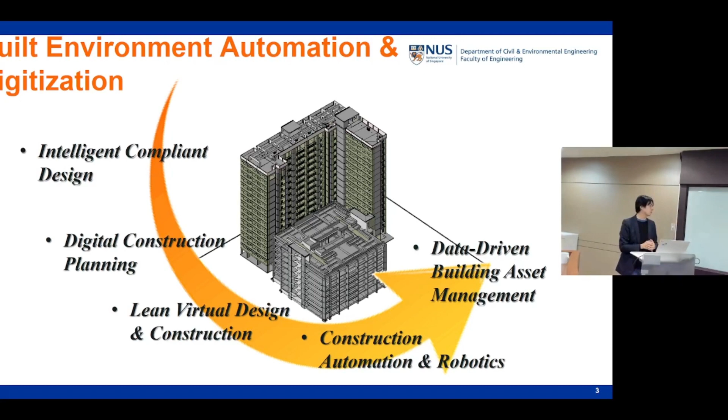So again, like I said, we have been very fortunate. We have had a very good few years getting projects from the industry as well as from the government. So we work very closely with the industry. Quite a number of our projects are sponsored by them. We also have a lot of working relationships with the government agencies.

So I think some of the interesting projects that we have are, the first one, on the drone-based facade inspection system, which I'll talk a little bit more about later. We also have projects related to earthwork volume estimation using point clouds, photogrammetry, and BIM. And one that we are currently working on now is on monitoring of ground settlement using point clouds.

Our recently completed project is on the integrated robotic BIM inspection system, which I will show a little video that we have on. We also have one where we work with one of our industry partners to create an autonomous robotic excavator. And of course, the last one, which I think is very relatable to this group, is on BIM compliance and system structures.

So in terms of our philosophy, as a research group, we have this thing that we call the 3P framework in our research lab. So it encompasses 3 things. One, process, related to information, building information modeling. The other is on product, where we look into automation and robotics as a prime mover, facilitator of the product. And of course, the last one, that I think is the most important, that I'm trying to get my students on board with, is on people. How do we interact with the built environment? So my research group's core themes are focused on these 3 Ps.

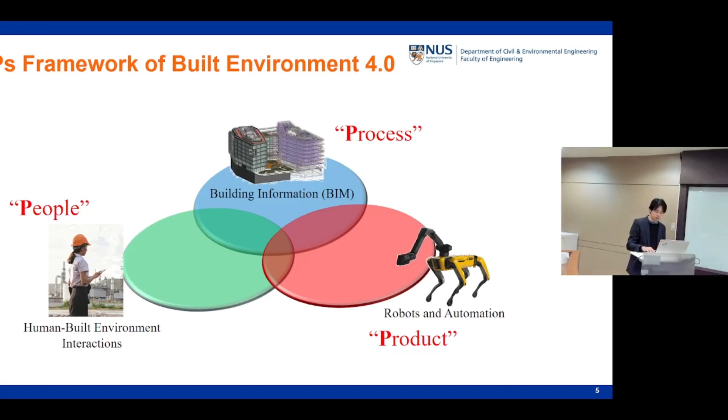So just to show some quick examples of how we have used the 3 Ps. So for the first one, we have developed something we call the crane information models. So the idea is this: if we have building information models of buildings, why don't we have them of major equipment? So one of the things that we have developed is crane information models.

And what's good about these crane information models is that we use them to check on safety compliance: when we are presented with a lifting plan of cranes, whether these cranes fulfill the requirements of the ministry. Not only that, we have actually been able to use this to calculate the reach.

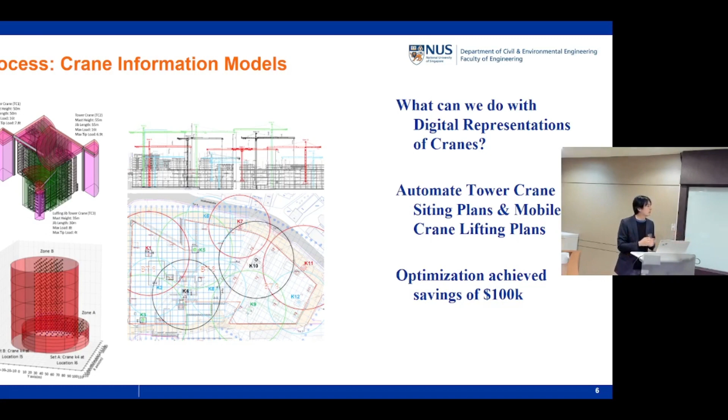And from there we have also been able to use optimization techniques. So harmony search was actually one of the things that we played around with in trying to optimize where we can place the cranes using the crane information models, because that would allow us to see what we can pick up and where we can place the different elements. So that was nice. We worked with a contractor on this, and we showed them that we could potentially save them about 100,000 Singapore dollars, and they were quite happy at the end of the project.

Now, another one on process, again related to BIM. So one of the things which I'm interested in actually is, where BIM is concerned, the major problem with BIM is actually the quality of the information that goes into your models.

As much as in academia and in an ideal situation we tell people that your 2D drawings are actually snapshots of your 3-dimensional BIM, the reality is no. Why? For various reasons, the industry is still developing design documentation in 2D, and then they work the other way around. So from 2D they come up with the 3D in BIM. And when they do that, typically a lot of errors happen.

Human errors will come in and create problems with the model. So we have developed a framework where we use computer vision to compare the 2D design information and the 3D models. From there we try to pick up where the errors are, and identify this to the modelers so they can make that change in their modeling system.

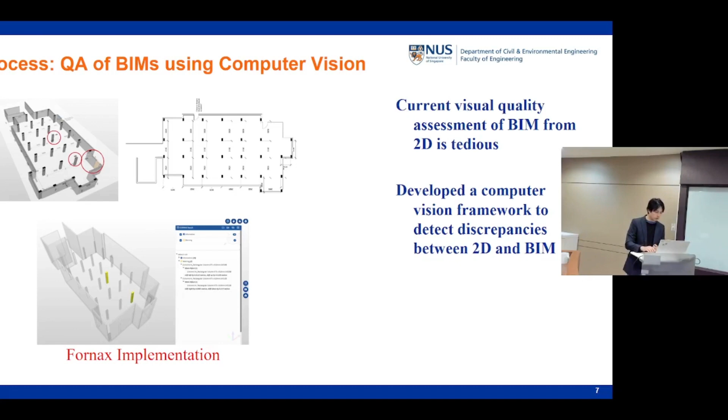Something else we developed along the lines of quality assessment and quality control of structural BIMs, working with one of our major consultants in Singapore called Sembcorp. We created what we call an IQA framework, an information quality assessment framework. This assessment framework allows us to look at the model, and from there we can actually quantify the amount of correct and complete data that we have in the model.

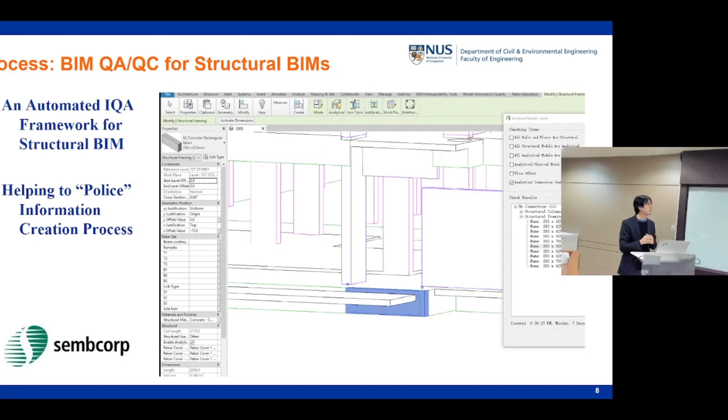From here we can help to police the kind of information that goes into the model. So we can assess whether this is a good model or a bad model, based on the requirements, in this case of a structural engineer, whether they need that kind of information. So we created a plugin that goes into Revit that allows them to do near real-time monitoring of the information that goes in.

A small interesting side project we came up with, again working with Sembcorp, was on the conversion of architectural BIMs to compliant structural volumetric modules. Some background: in Singapore we have been pushing this idea of volumetric construction, with our own local term for it that we call PPVC. The problem is that architects, when they do the design, do not have any concept of how the structural modules are supposed to be created. So we created a plugin to help that process.

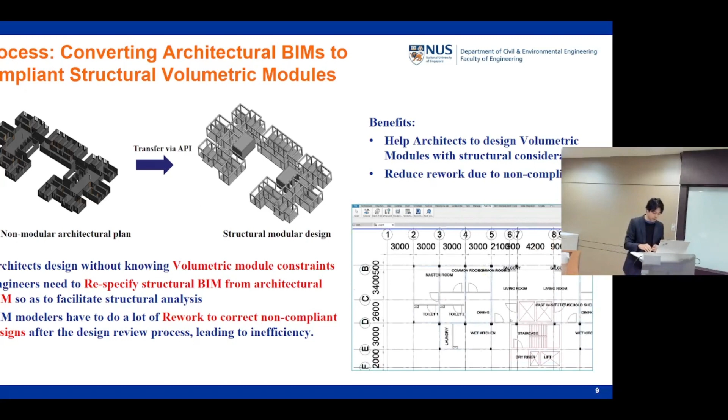So what it does is the architects input their architectural models. Our plugin, our software, will go in, assess the model, extract the necessary information, and convert the model into a structural model. We can take this and throw it into Midas, a very big Korean company, or into ETABS, and it will do the analysis for us. We hope that by doing this we can shortcut that process and reduce the errors from the architects to the consultants.

So this is something I just added today. After Prof Z sent me his slides from tomorrow, I thought this would be quite interesting. Now, when we talk about BIM and using BIM for compliance...

The challenge is normally in how we code that information into whatever it is. I believe your group, sorry I forgot, you were saying just now that you had a Python rules, a rule concept. You'll find that when you try to do this, there's actually a very big discrepancy between the person who knows the actual code and the person who's actually implementing the code. This is what's happening in Singapore: the person who knows the code has no idea how to do programming, and the person who's implementing it, programming it, has no idea what that domain knowledge is.

So we introduced this concept of a conceptual graph. Well, the conceptual graph idea was not from me, we borrowed this concept from somewhere else. We use this to help bridge between the code implementers and the domain experts. By both of them understanding this, it becomes a common language they can use, so that they can transfer that information from the domain experts to the code implementers.

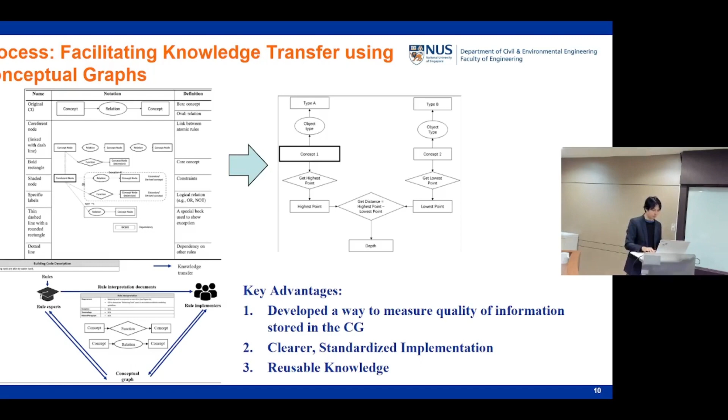You can have good conceptual graphs, you can have bad conceptual graphs. How do we define a good conceptual graph? So our work went into defining this, and we then used it in a test scenario to see whether or not we could improve the quality of the information that gets input into the rules. I thought that was something that nicely aligned with some of the things your group is doing.

So this is the part where we are working very closely with a government agency in Singapore. We are working with them on using BIM to do structural compliance and code checking of structural elements. So just to give you an overview of how this whole framework works.

In Singapore, when we do structural design, typically the structural designs come from the architects. Before we do the actual structural design, the architect will pass us their models, and from there we will develop the structural BIMs. Ideally, from the structural BIM, we will then develop the analysis models that we put into the structural analysis and design software.

The problem is that what BCA, or the Singapore government, wants to do is take these few models and check whether you've done the right modeling. So if you say you have a beam, column and beam in one model, do you have that same column and beam in another model? If you have put information here, do you also have that information in another place?

This is a little different from the code compliance systems you've probably been researching. In most code compliance systems today, code compliance is very prescriptive. The code says, clause 13.1.1, an air well must be 5 meters away from something — that's the kind of code compliance that goes in. This is typically usual for architectural codes. Now, structural codes, while we do have some of these...

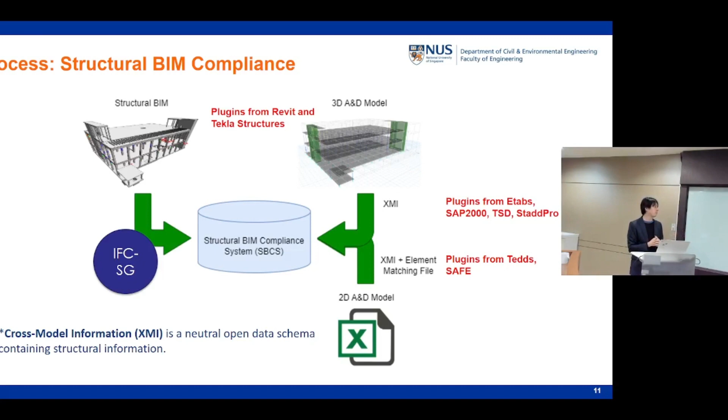So the secret sauce to achieving what we wanted to achieve: one of them is this thing that we call the cross model information, XMI. This was developed by my research group. It's a neutral open data schema.

The website is already there. There's a preliminary version 1 on there now, where we detail out the different classes. There are 25 different class entities covering things from structural nodes to structural members, even structural point connections and so on. The last time I did a count, over a year ago, we were looking at over 350 structural properties encompassing all these different 25 classes, used in different combinations.

Now this is very much a work in progress. At this point in time, the schema covers the major building elements and materials. In Singapore, unfortunately, that does not cover timber, so we only cover concrete as well as steel. We cover the major building elements.

One of the major building elements that we have not dealt with yet, and I think some of you were talking about joints - there's a lot of room to explore there, on the connections. Especially in Singapore, because a lot of our buildings are built with precast, the precast connections are actually a very vital thing, and that's something we're going to explore in the next phase of our project.

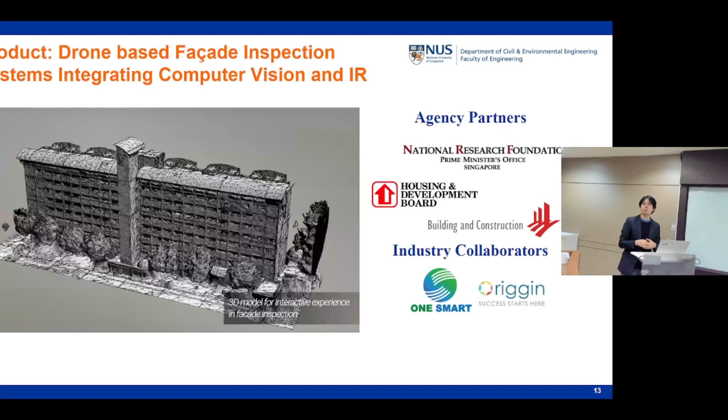In this UAV drones project, we do a lot of stuff. We do data collection using drones, and after that we get a lot of images, including infrared images. From here, we actually do a 3D reconstruction. One of the interesting things we do with the reconstruction is leverage Google Maps, using its geometries to augment our reconstructed models from the images.

Once we have that, we also look into defect detection. This is a very old defect detection using bounding boxes - today we've gone further into using segmentation to segment those. This is an old prototype, much improved now, but it shows the main functions and features of our prototype.

We are able to annotate, capture, and place comments, and the reason we're doing this is to shortcut the process for the inspectors. The inspectors use this app, and after that they can generate a report. So typically something that took about 2 weeks, using this app takes about 3 days, including the data collection process.

Yep, so we have also done some work on infrared. So the reason why we're using the infrared, what we're hoping to do is actually to try and see if we can detect delamination, right? Defects that are not visible. We're trying to see whether we can pick these up using infrared as a telltale early warning system.

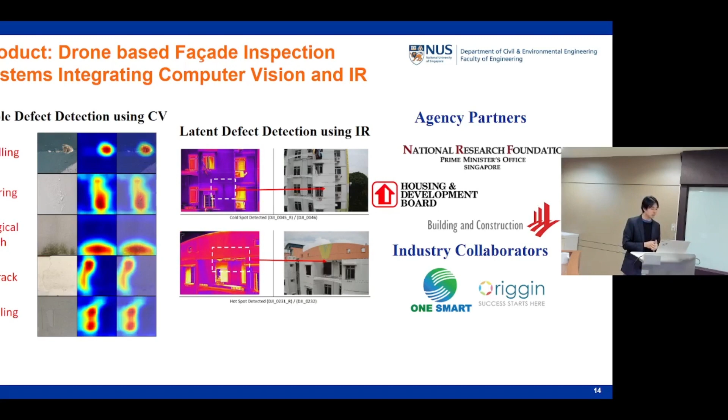Okay, so the other big project that we have in our research group is this thing that we call the Integrated Robotic BIM Inspection System. So the key issue that we're trying to address with this system is we find that it takes a long time for the building developers to inspect the buildings. Again, this goes back to compliance. We have many rules, many different things that we need to check in Singapore. These checks could come from the building developers themselves, the building owners themselves, and actually a big part of them also comes from the different government agencies.

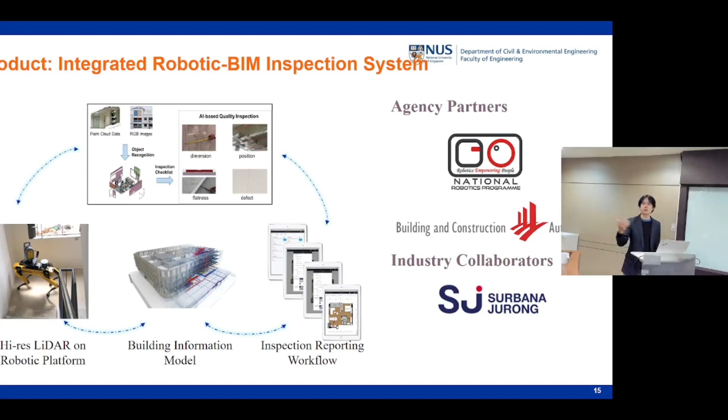So to shortcut that process, what we proposed was to use an autonomous vehicle like Boston Dynamics Spot. So we bought one. We worked together with Trimble, and we used a high-powered terrestrial laser scanner, in this case the X7, mounted onto the Boston Dynamics Spot, and we went around collecting that information. And the information that we're collecting primarily is in LiDAR point clouds. From these LiDAR point clouds, we then created algorithms to help us check and measure the differences between what was originally planned by the building developer and what was actually constructed by the contractor at the end of the day.

Yeah. So this was one of the marketing videos that my guys did. I think the project was quite a success. We're thinking about starting up a company to see if we can provide this service to the industry. So some of the features: it's robotics agnostic, it's cloud powered, there are inspection algorithms inside, and it also interfaces with BIM. Okay, so this is the architecture.

Let me. Oops. Oh no. Okay, I'm not sure how to control this. I wanted to fast forward, but okay.

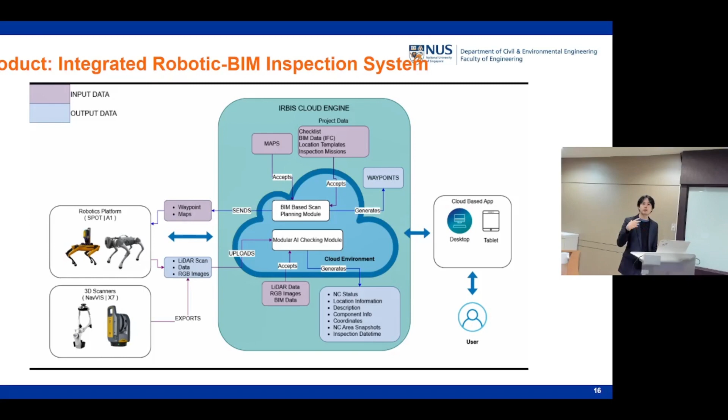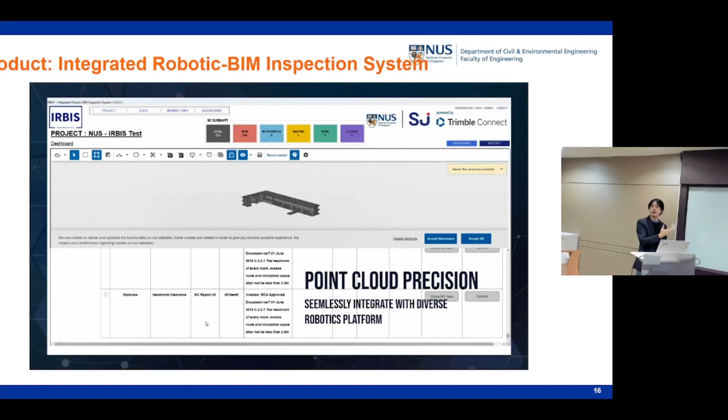Anyway, so we have created a cloud-based application that allows us to collect this information. And what's useful about this is that we interface with BIM. By interfacing with BIM, it allows us to shortcut one step of the process, which is segmentation. And from there, we are able to directly annotate the defects and pair them with the elements in BIM. So this actually creates a running archive of defects that we have found in the building. Yeah, so this was one of the projects that we did, and this is the prototype that we have. So again, very similar to the drone project, at the end of the day, the building inspectors will be able to use this app and shortcut their report generation process by using the app for reporting.

Okay, so the last one that we have is on people. My group is very interested in the use of virtual reality and augmented reality. And one of the key things that we wanted to discover was how effective augmented reality and virtual reality are in construction inspections. When we go out and converse with the industry, we hear a lot of people telling us augmented reality and virtual reality are very good for construction inspections. So we wanted to test that. So we created a game that simulated the use of augmented reality and virtual reality in a construction inspection process.

And we got people from the industry to come down and see if they could identify the defects in this game. The outcome of the game actually showed that it's not always true that using augmented reality would allow you to pick up construction defects on site. It's not always true. There are a lot of other things that affect whether or not a defect is actually picked up by the inspector. So we are publishing a paper now to show that augmented reality and virtual reality have their benefits, but for construction inspection, there's a lot more that comes into play, and it's not just the use of the technology that would enable construction inspections.

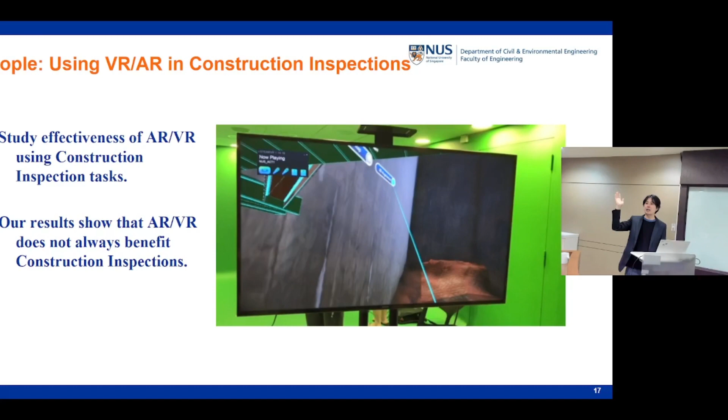Yeah, we played this with some of the students. They loved it so much that they purposely failed to find the defects because they wanted to see the retaining wall collapse, and they were very excited by the collapsing retaining wall.

So the last one that we have. This is again one of the latest works from my PhD student, and that is we wanted to create a method to track people in the building. If you may have seen some of these, they use cameras, they use infrared, to try and track people in the building. But once you use cameras, this raises the issue of privacy.

So we wanted to use a distributed acoustic sensing, a DAS, which is an optic fiber-based vibration tracking mechanism. By using this, we could create a privacy-preserving, large-scale occupant tracking device. We can lay this out over many different floors in the building, and we can pick up and see how people move from one room to another, whether they walk diagonally across the corridor, and so on. So this was very useful.

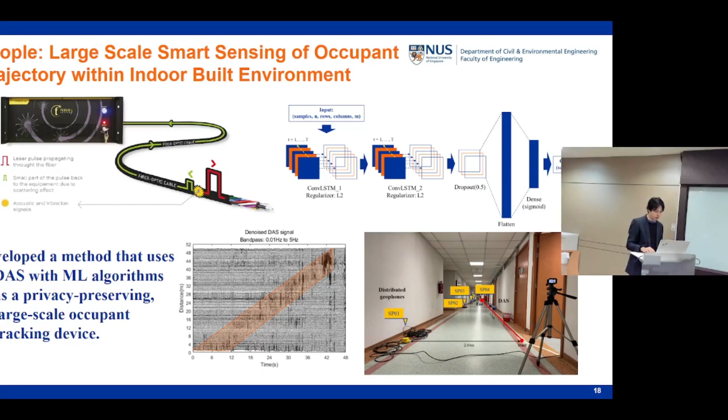One of the innovations was that my student created a machine learning algorithm to try and identify the movement and the footsteps of people using this particular device. So quite successful. We're quite happy with the results, and we are looking to work more on this device. So that gives an overview of all the different work that we've been doing in my research group.

So let's talk a little bit more about... Oh, it's there. Okay, I thought it was duplicated. Okay, so I'll just quickly run through.

Just to give some background about Singapore, to quickly skim through because you'll hear more in depth tomorrow. In Singapore, we have introduced something that we call the CORENET-X system. It has been in development for very long, and CORENET-X is the latest iteration. One of the things we want to do with this system is to be able to check the compliance of our building submissions, the regulatory submissions.

There are 5 components to this CORENET-X system. The first component is what we call the pre-submission check. That means the engineers and architects, before they submit to the government, can use the system and check through first. Basically the system says, okay, you're good, and they can proceed on to the next step and submit this.

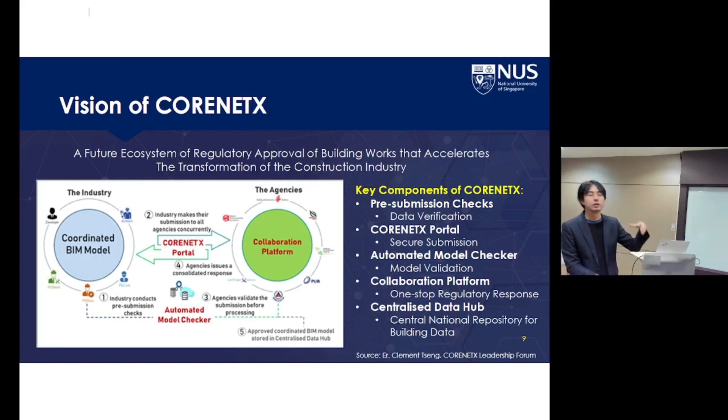And the last one, of course, is on a centralized data hub. So one of the things that we are hoping to do with CORENET X is that once we start to receive all this information, we are going to put all this information into a central data hub that's going to be stored by the Singapore government.

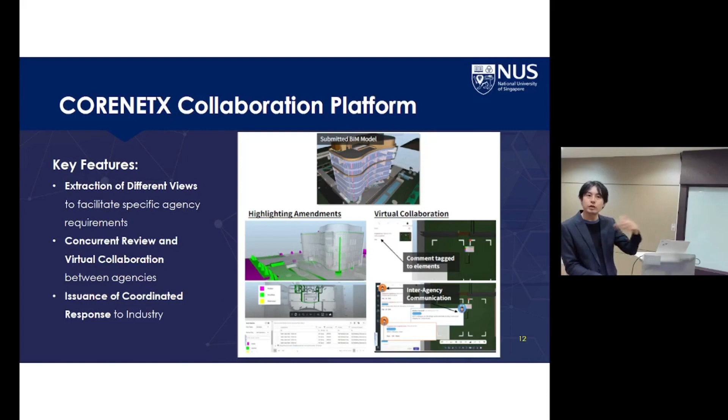Okay. Yeah, so this is the first version of the collaboration platform. In this collaboration platform, what's nice is that the different agencies can actually customize their views, so they can extract specific agency requirements from these views. They can then do a concurrent review and virtual collaboration like what I described earlier. And once they have done that, they can issue a coordinated response to the industry.

It's okay. I tell you what. Yeah, I'll use my own slides. Yeah, I think that will be better. Do you present the same tomorrow? No, I think there are missing slides in here, so I'm using my own. Yeah, I'll be using my own instead.

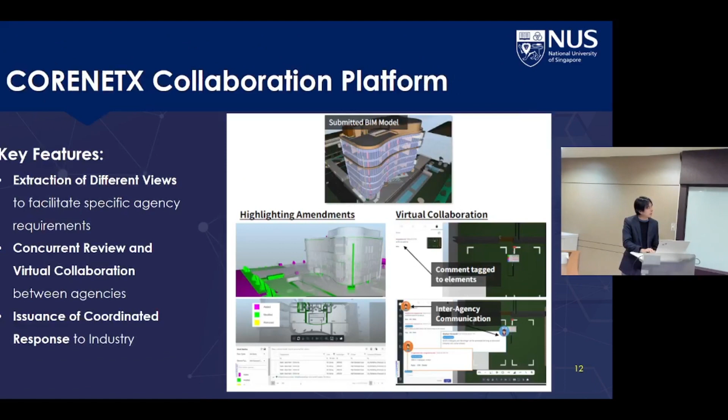I'll just quickly run through this. So this is the CORENET X platform, and these are some of the changes that we're going to be making with CORENET X, which is to shortcut some of the processes. Okay, so one of the key enablers for CORENET X, which is on our Singapore BIM, is the introduction of this thing called the IFC-SG.

So I mentioned earlier, IFC itself is a very well-known common building data standard, and what the Singapore government has done is that we have started to extend the IFC information. Why? Because not all information that is found in the codes is represented in IFC. So that's what we have done to enhance that.

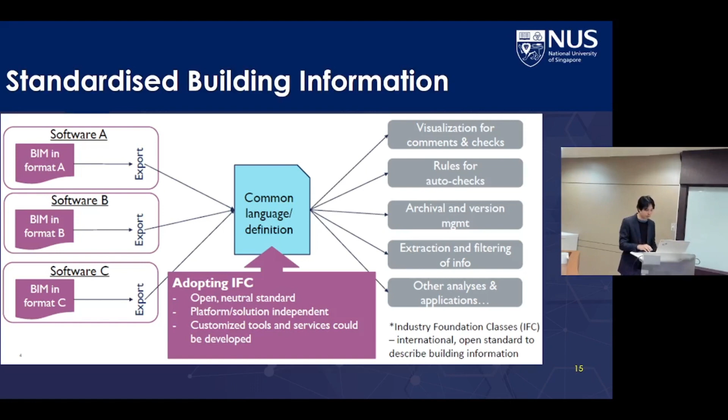Okay, so in terms of our policy on IFC-SG, in creating the IFC-SG, we have based this on a specific version of IFC that we call IFC4, and specifically on the use of the reference view, which is the model view definition. The reason why we're using this IFC4 reference view is because IFC is a big data format. There's a lot of information inside.

Unfortunately, actual implementation of IFC is limited. If you use Tekla Structures, if you use Revit, and you look at the exporters that come with these, normally these exporters are not able to export the full IFC. The full IFC is just too big, too many things inside. It's very difficult to get that. So the common subset of IFC information that is supported by all the major software is actually IFC4 reference view. This may change in the future.

buildingSMART, which is managing the IFC standard, is looking to get more of the software vendors on board, particularly for the structural analysis part, and for architectural coordination and so on. So there's actually a lot of changes up and coming. But for now, for the IFC-SG, we are basing this primarily on the IFC4 reference view.

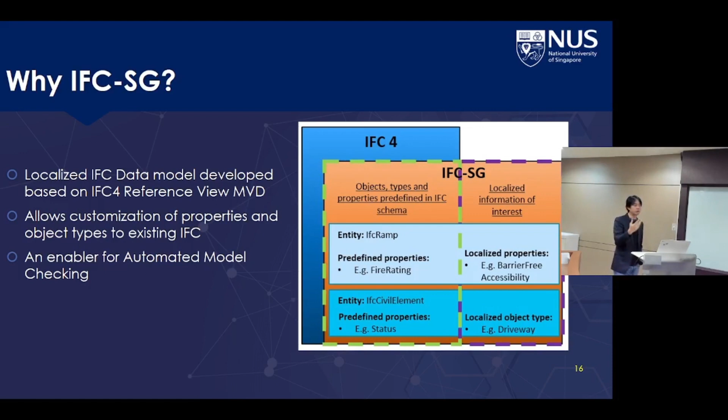And the reason why we're doing that is because if we start to create our own IFC elements, then the problem is that nobody else in the world is going to export these elements for us, right? So that's why we have veered away from doing that. So IFC-SG works that way.

Limitations, well, I wouldn't say it's limitations, but some of the things that we have to do in preparing these models for submission, we are hampered by size. Okay, so IFC is a huge data format. Don't underestimate the IFC file. If you open an IFC file, you see text inside, and so you'll be very happy. It's nothing but text. But text actually takes up a lot of space. So a good sized building would easily come to gigabytes of data, depending on how you size the building.

So we have actually put in an artificial cap telling all users that you are not to exceed 800 megabytes in size for IFC file submissions. Because some of the projects are fairly large and complex, we actually advocate that they do a federation of the model, which means that they cut the model into small pieces for submission.

And one of the things that we are asking the architects and the engineers to do is to make sure that the models that they are preparing have to be georeferenced. This is because some of the codes, for example from the Urban Redevelopment Authority in Singapore, URA, are not just for one building, they extend beyond, to a whole group or whole estate of buildings. So because of this, we have asked the engineers and architects to georeference their models according to the Singapore SVY21 coordinate system.

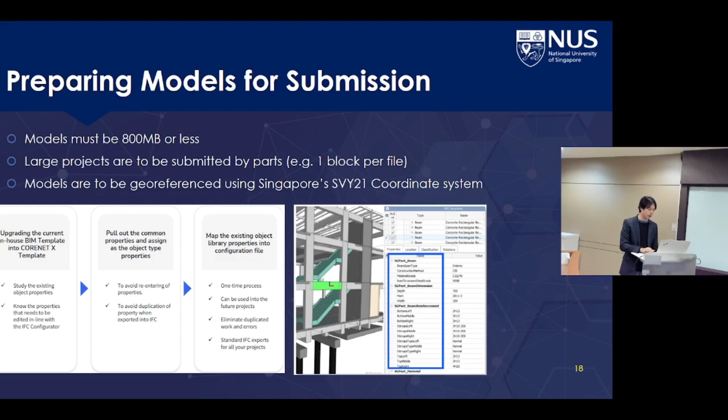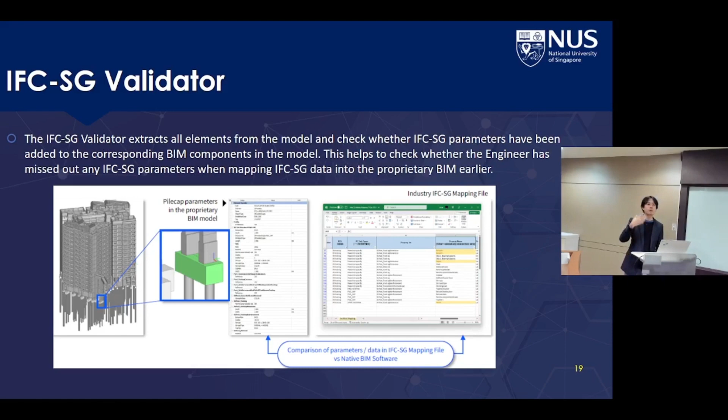Okay, so to allow them to check, BCA has also implemented what we call the IFC-SG validator. So the architects and engineers can submit onto a website, and this website will check through the model and make sure that all the information that's been entered complies with the IFC-SG data schema. So it addresses things like if you have spelled things wrongly, if you have missing elements in the IFC-SG, or you use a wrong property set. These are the common errors that this IFC-SG validator will churn up.

In terms of engagement with industry, this is from our learning points based on the 2 years of engaging the industry for CORENET X. IFC-SG is very difficult to implement. I'm not going to hide the challenge. It takes a fundamental change for the industry because prior to this, very few of them have heard of IFC. And suddenly, we are asking them to submit this IFC-SG. So this is a big fundamental change.

What the government is doing together with the universities is now we're trying to organize sessions, educate the engineers and the architects as to what the IFC-SG is and how to deal with some of the common problems with IFC-SG.

The other complaint that we get from the industry is that it takes a lot longer to model now because of implementation of the IFC-SG. We have tried to automate a lot of the processes that go into it, but there will still be added information that will need to be put into the model. So there is some resistance from the industry about these longer modeling times.

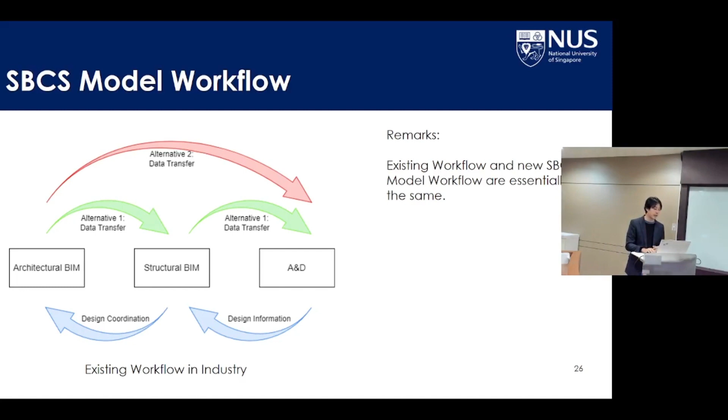Okay, so there's good, there's bad. The good point is it's shorter. The bad is if you make a mistake, you need to redo your information again. Okay, so those are the two ways that we have going about. Now, having said that, we are not in the business of trying to change how they think about their processes. So we are going to try and see whether we can adapt and accommodate both workflows.

We were rather fortunate. We talked to the different software vendors. So there were two groups of software vendors that we talked to. One was the BIM software vendors, and the other were the analysis and design tools. So we managed to get on board 8 of these different softwares.

We actually asked Midas, but at that point 2 years ago, Midas told us that they didn't have an API, so they couldn't participate. But now maybe I should give Midas a call again. They're working on their own. Oh, they're working on their own.

Okay, that's good. So the different participating software: Autodesk Revit, Tekla Structures. We also have ETABS, SAP2000, SAFE, which are from CSI, and we have Tekla Structural Designer (TSD), STAAD.Pro, and Tekla TEDDS, which is an element modeling software, 2D element modeling software. So we have created plugins for all these, which means that they are now able to export the necessary information in the right format that we want, so that we can now do the model checking. Okay, so I mentioned this earlier in the previous set of slides.

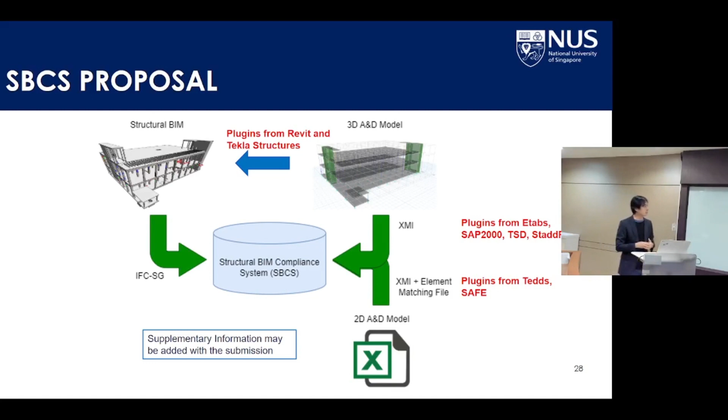Yeah, so the first one that we developed as part of this was the XMI schema. How do we frame the information so that we can read and write without confusion? The other that we have, which is a forthcoming paper, is how do we match the elements. So if you have elements in one model and I have elements in another model, how do we know that these two elements are actually referring to the same thing? Okay, don't forget this is different because one is from the analysis and design model, another is from your structural BIM.

Okay, as an engineer, if you look at this, you can manually say that they're the same. But from a computer perspective, identifying this will have a lot of issues.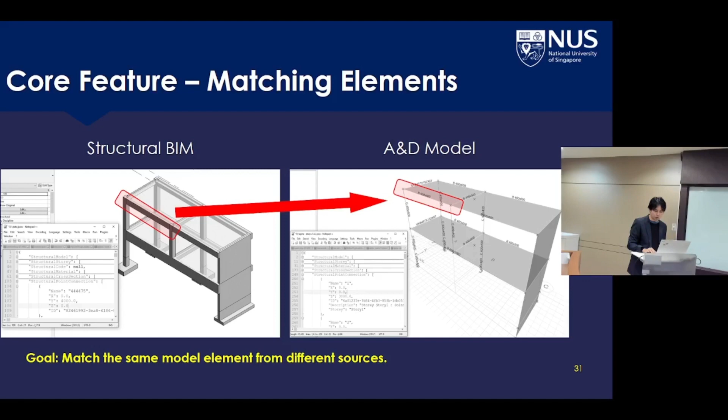So we have created ways in which we can identify the elements and say which one matches which one. As part of that, we have created 30 checks and 60 rules. Like I mentioned earlier, the rules we put in place are engineering rules of thumb, not exactly the kind of code clauses you'll find in the engineering Euro code or whatever. We created 60 of these, and more importantly, we created 30 checks that check the information being fed into the system to make sure the model is verified.

At the end of the day, what is presented to the user is three things. One, it will trigger a pass, which means everything is okay and we continue to submit. The second is it will trigger a warning, which means maybe something is not quite right, or it requires the engineer to put in additional information in the form of supplementary files or something like that. We are not going to reject the submission straight away. The third is an outright fail, which means there's something fundamentally wrong with the submission, and we'll flag this as a fail and tell the user.

So just an example of some of the checks we do. One check is on the total area of the beam longitudinal reinforcement required, checking that it's less than what is provided. This looks at two different sources. Your analysis and design will tell you how much you need in terms of longitudinal beam reinforcement. When they input this information into the structural BIM, this is what is actually being designed or provided. So there's a difference between these two, and what you need to check is that one has to be greater than the other - what you provide has to exceed what is required by the project.

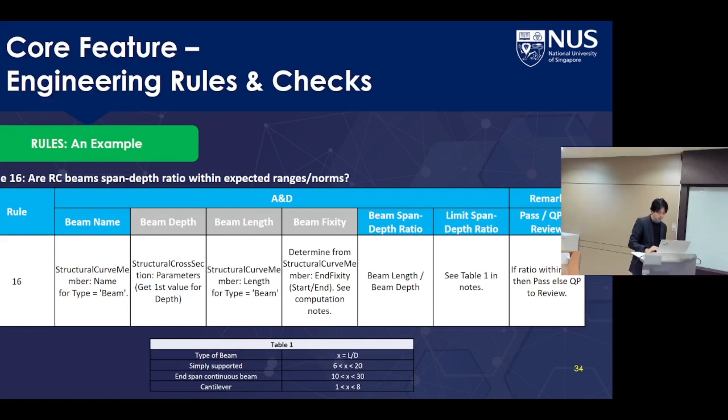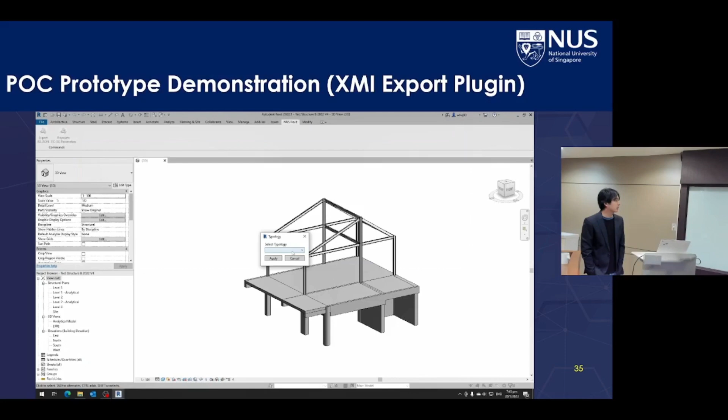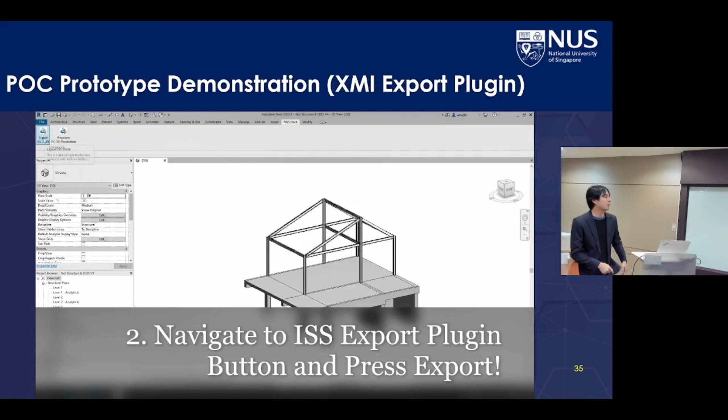This was part of the demonstration we did to the government agency a few months back, where we showed the export plugins that we created. This was one we did for Revit. For Revit, the user needs to put in some of the information. We've created a plugin that will copy his information from the analysis and design and automatically populate the structural BIM information, to cut down on the time he needs. Once it's done, it's basically a click of a button to export the information.

What you're seeing over here is the XMI schema. It follows a JSON schema, and from the JSON schema we can extract out the information that is required of the model.

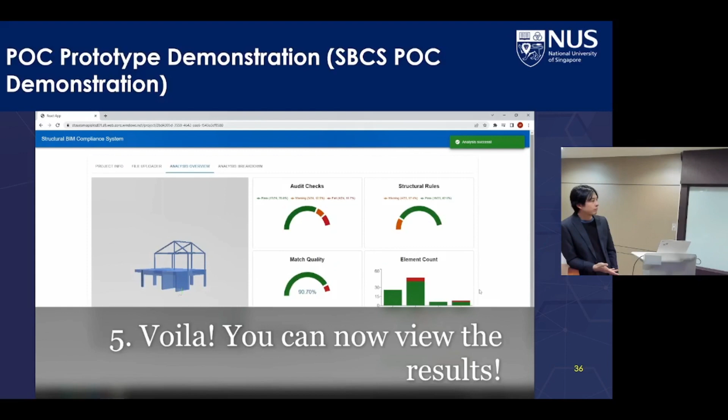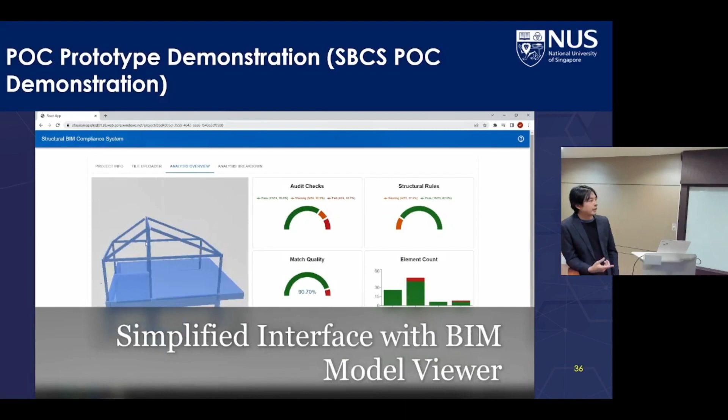This is the proof of concept demonstration of our system - a very early stage POC that we did. We have one that looks a lot better now. In this particular POC, it's still cloud-based, allowing us to input data, create projects, and view the results in real time of the project - how many rules have been checked, which rules failed, and so on. We can then zoom in on the trouble elements, the problematic elements, to identify what needs to be done and where these elements are located, so the engineers can take appropriate action.

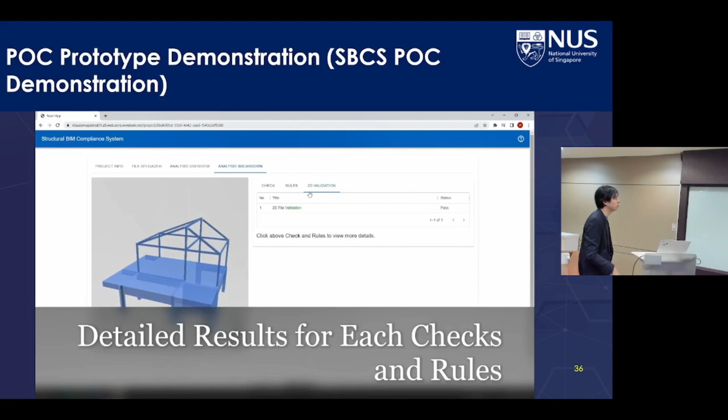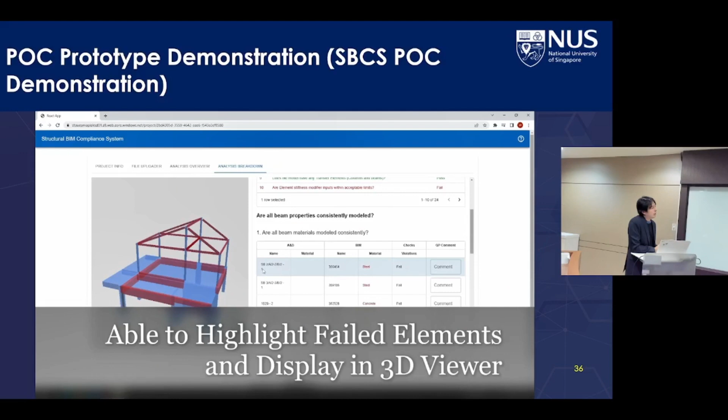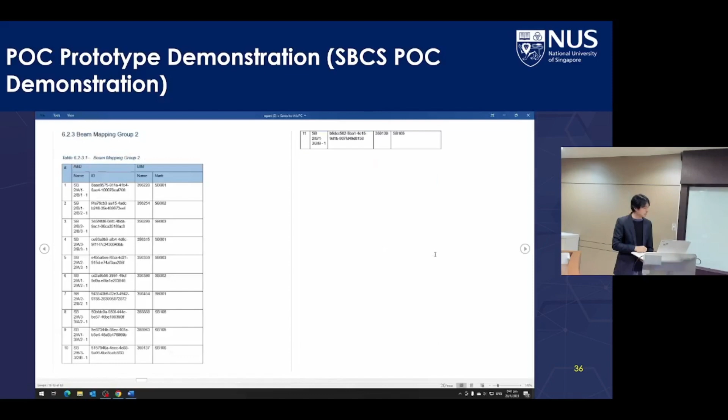So basically, that comes to the end of this part. The CORENET X is going to go live in a few days.

On the 18th of December it will be the soft launch. The focus of this soft launch, however, will still be on the architectural side. We're still working on integrating our part with the CORENET system. I'm looking at sometime June next year.

During that time, the soft launch will move towards the voluntary submission stage, which means we will ask the engineers to submit out of their own accord. In 2025, we are looking at mandatory submission, which means the whole industry will start to submit all their designs in 2025. Very ambitious project, very ambitious goals. I hope we can do it.

Okay, and that comes to the end of my presentation on this.

Very nice, very nice. I didn't expect that you're gonna present more than one hour. Did I take more than one hour? I'm sorry, one hour presentation. Oh no, I'm so sorry.